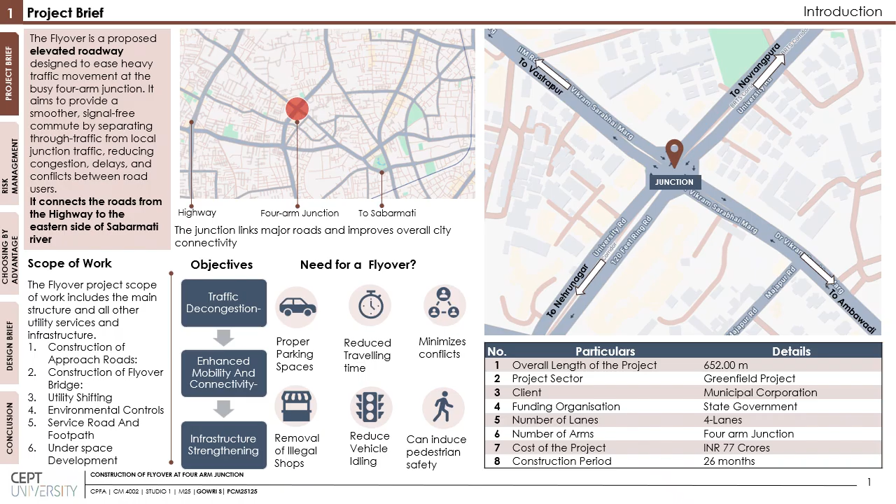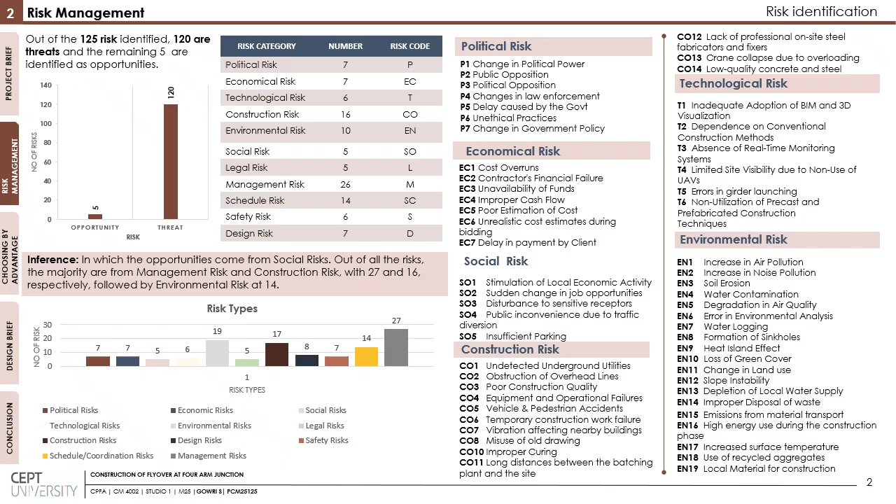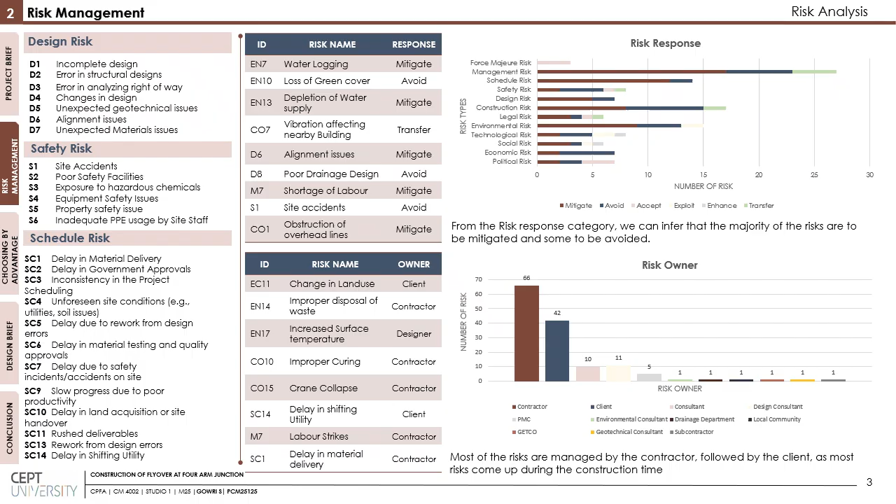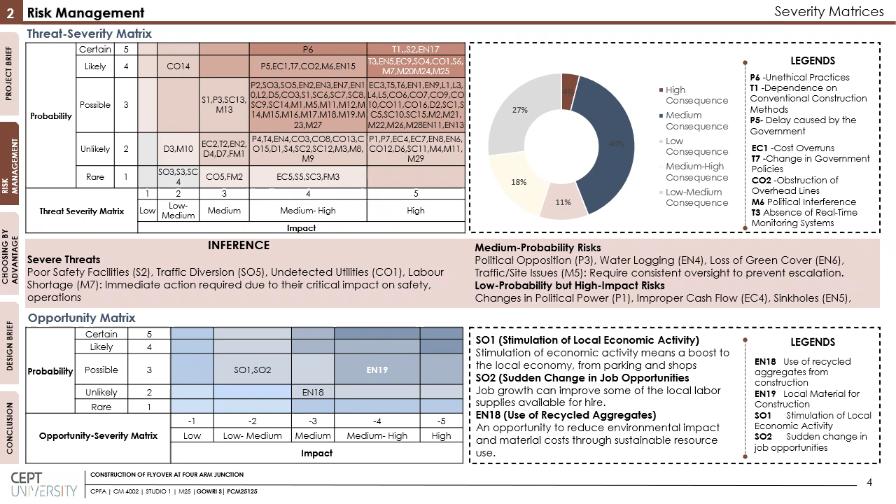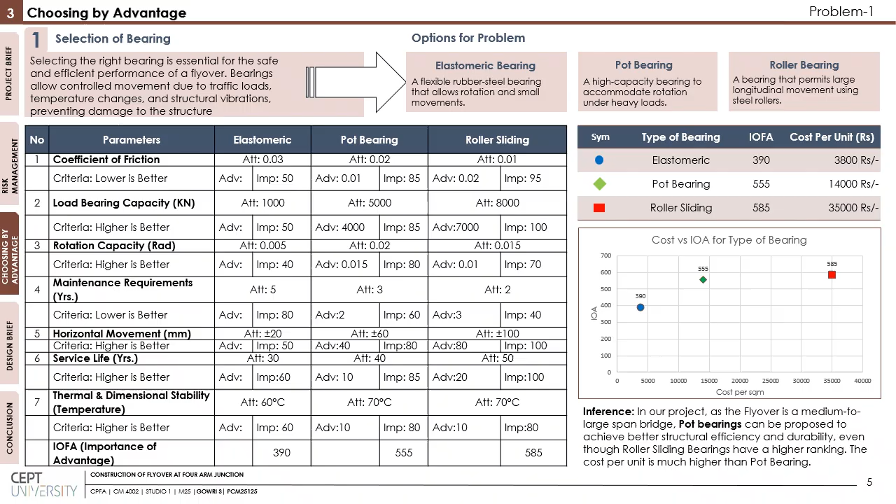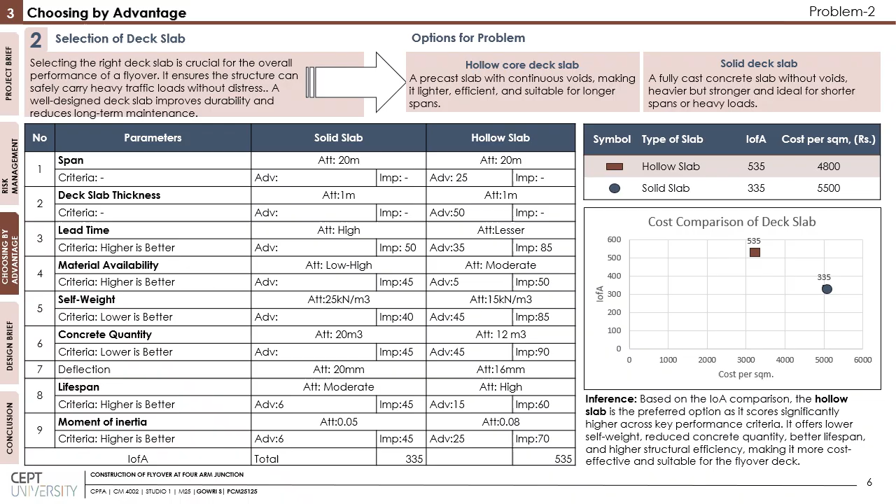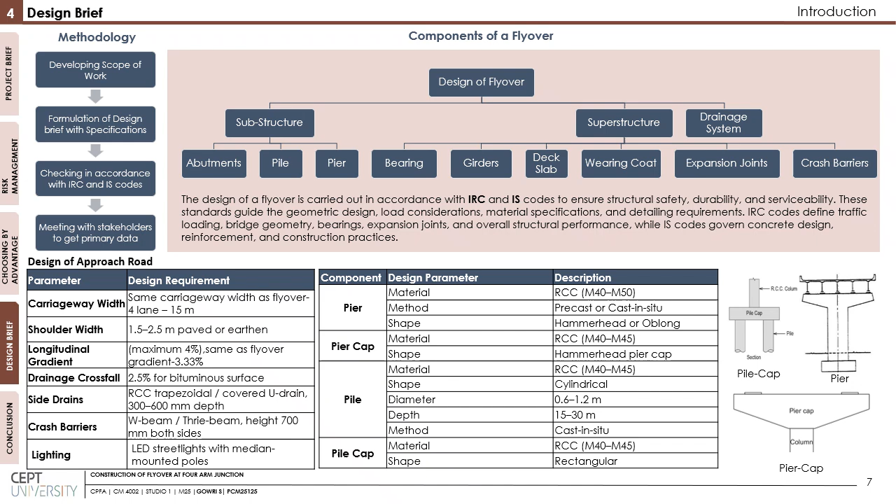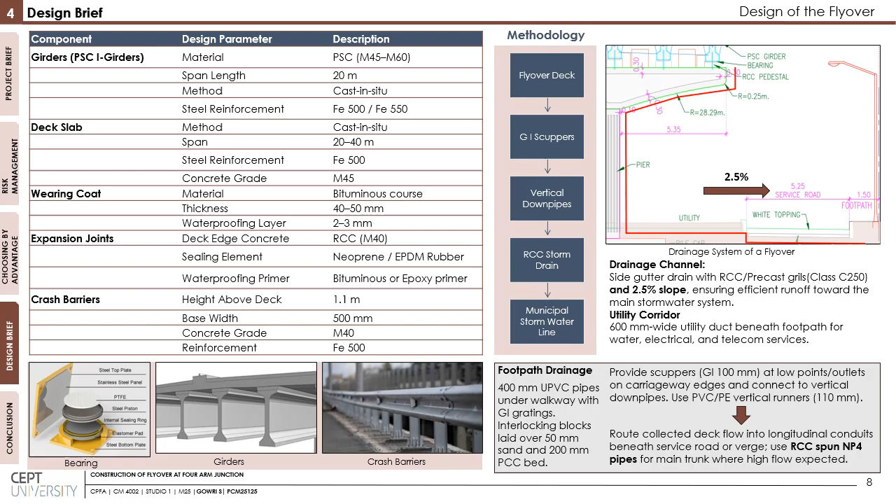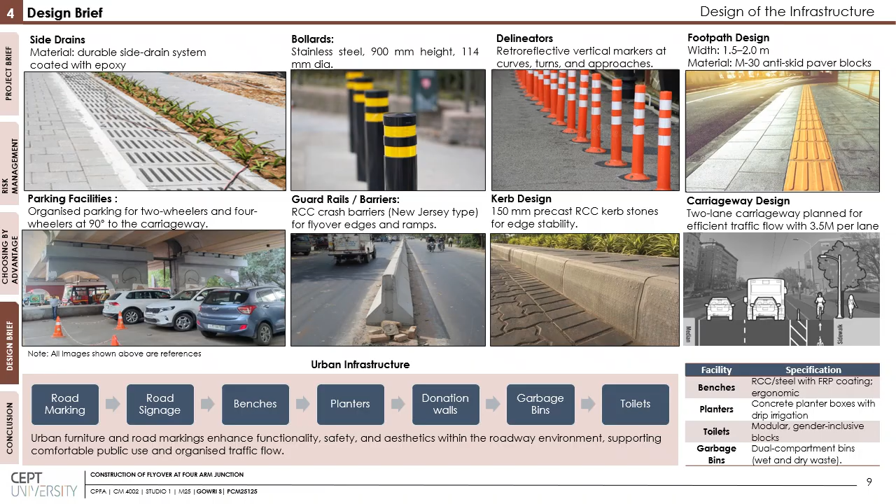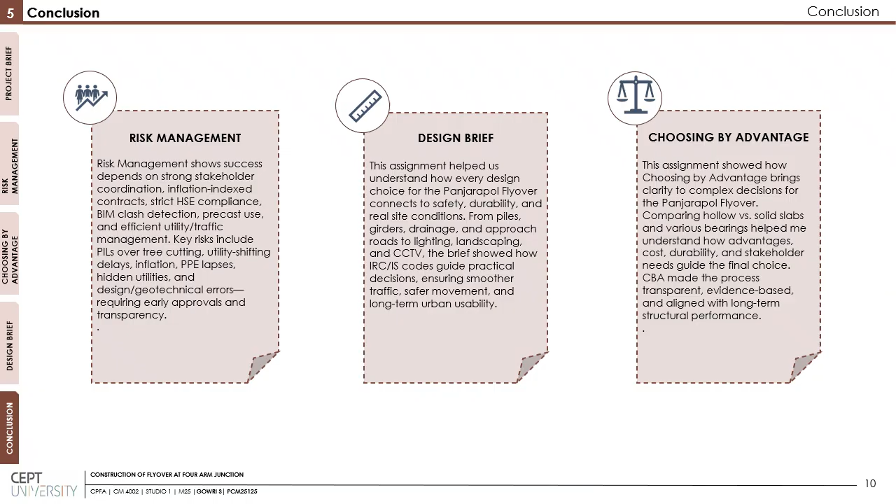The design brief guided by IRC and IS codes ensures that every component from pile to crash barriers meets safety, durability, and serviceability standards. Overall, the project demonstrates a structured and evidence-based approach to designing a modern flyover that improves mobility, reduces congestion, and enhances urban infrastructure at a critical junction.